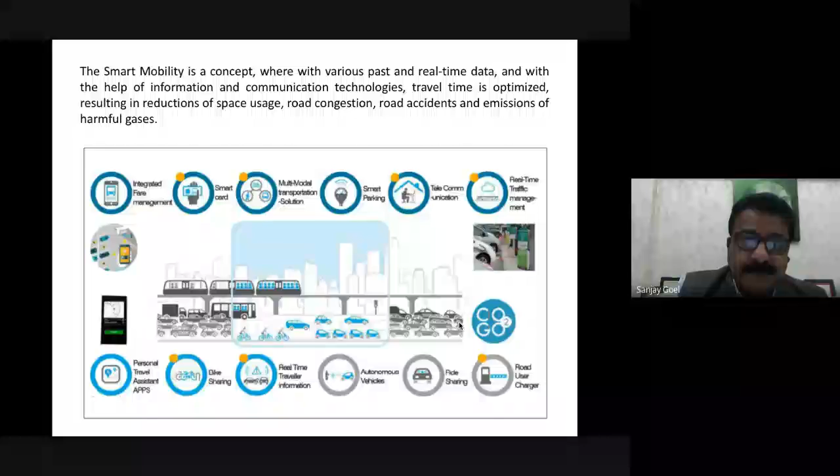Smart mobility is a new and revolutionary way of thinking about how we get around, one that is cleaner, safer, and more efficient, also known as New Vision: zero emissions, zero accidents, zero ownership. To achieve this target, it will take a lot of time, even in our state capitals, even in already livable and best cities like Chandigarh or New Delhi. We have to make more and more efforts as the number of vehicles is increasing at a very faster pace.

The concept of smart mobility includes a wide range of modes of transportation: kick scooters, bicycles, regular bicycles, electrical bicycles, and foldable bicycles, buses, light rail trains, subways, streetcars, taxis, autonomous vehicles, and walking. Moreover, users have the option to own or share.

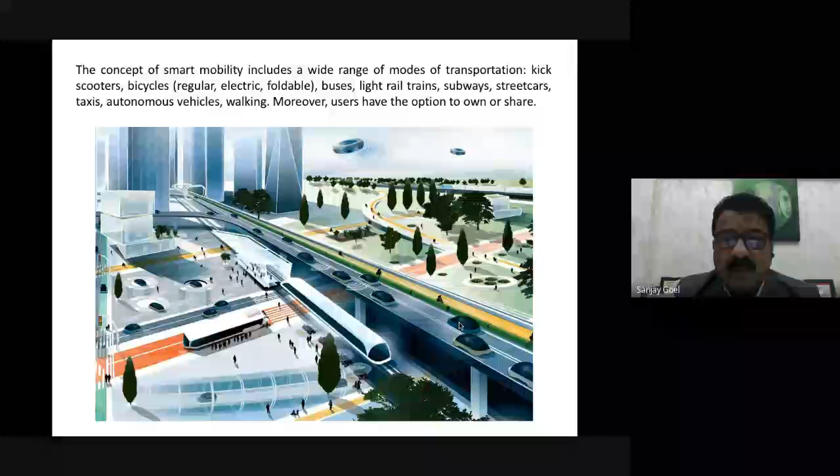So, what is smart mobility? Why is smart mobility needed?

Transportation and the traffic problem. The concept of transportation can be boiled down to two parts: individually owned cars and public transportation systems. We have seen that individually owned cars are increasing, two-wheelers are increasing, but the public transportation system, except in very few cities in India, is not up to the mark. In cities like Jalandhar, Amritsar, Ludhiana, cities of Punjab, and few cities of Haryana including Gurgaon, the public transportation system is not up to the mark.

The car has transformed cities and the way we live. As urbanization and population have increased, road traffic has become a huge problem in cities across the world.

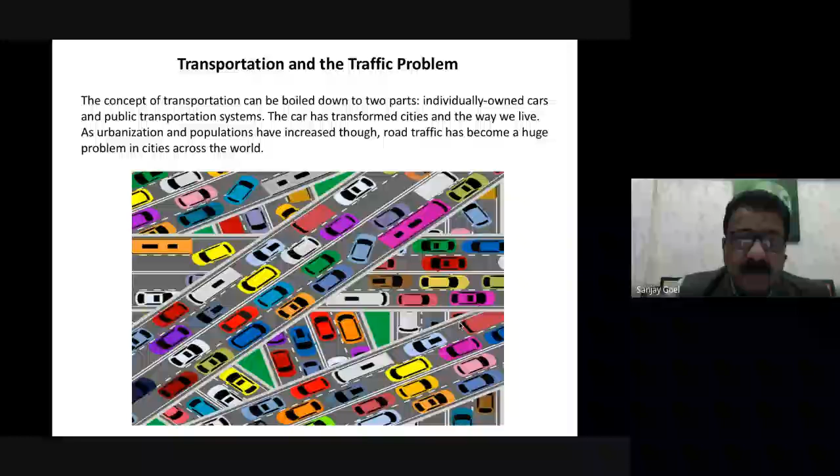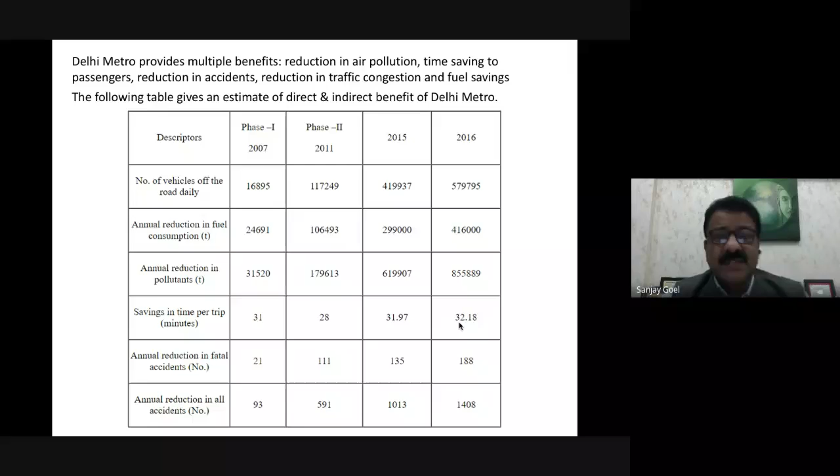Delhi Metro is one of the best solutions we have seen in NCR during the past couple of decades. Delhi Metro provides multiple benefits, which we are expecting in other congested and old cities like Ludhiana, Kanpur, and others: reduction in air pollution, time saving to passengers, reduction in accidents, reduction in traffic congestion, and fuel saving. Let's take this example of how Delhi was before the launch of the metro.

Even today, the scenario is not good in spite of the introduction of the metro, although the metro has increased a lot in number of stations and kilometers covered. The table gives an estimate of the direct and indirect benefits of Delhi Metro, in terms of the number of vehicles off the road daily, annual reduction in fuel consumption, annual reduction in pollution, savings in time per trip, and annual reduction in fatal or serious accidents, among other things.

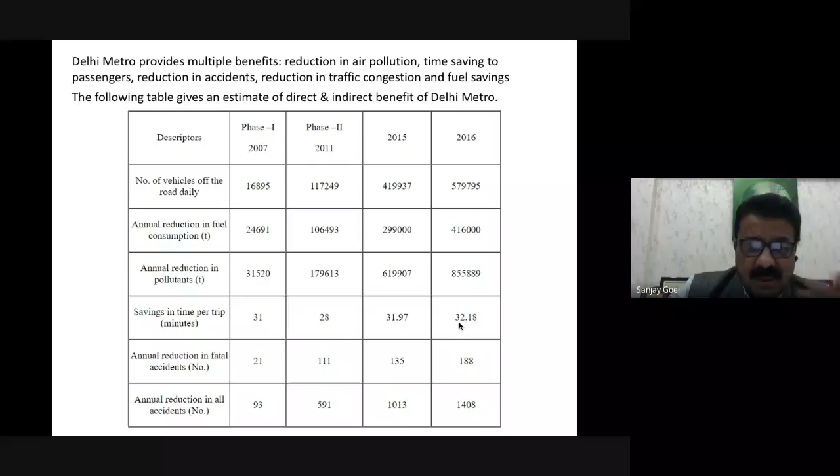We can compare and see that now, in many places, Delhi looks comparatively neat, clean, and green after the introduction of Delhi Metro. With parking available, one can leave home in time, park the car at the metro station, and reach the office or destination within a few minutes. It is a very comfortable path, and we are waiting for the same kind of solutions for the majority of upcoming smart cities.

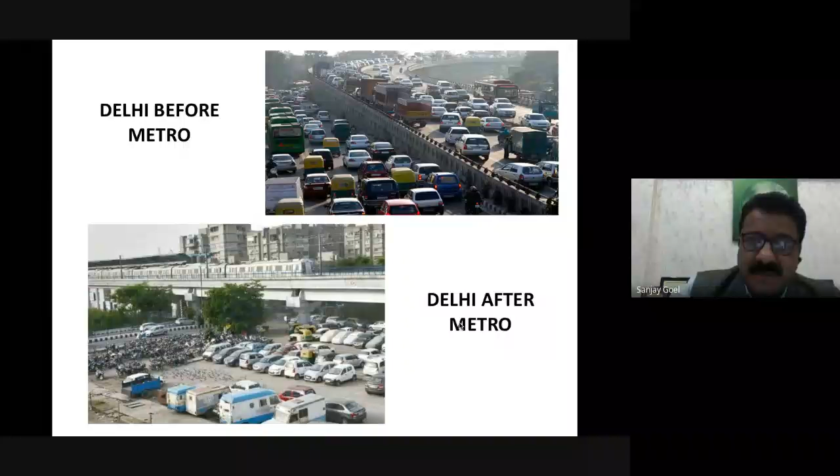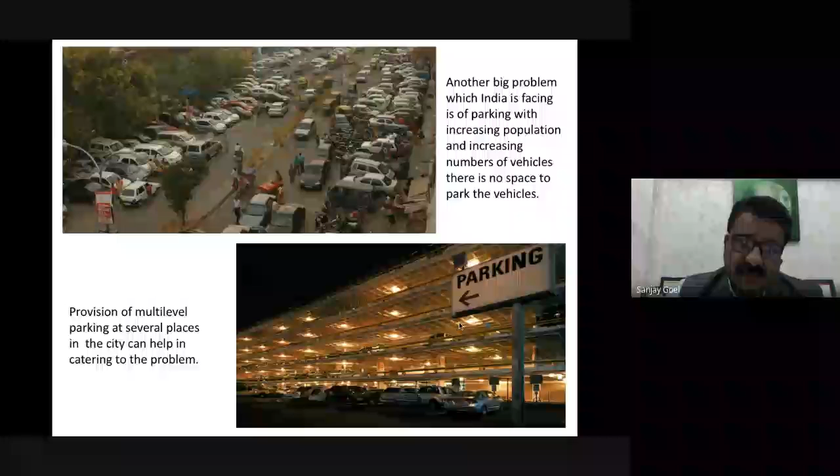Another big problem India is facing is parking. With increasing population and increasing number of vehicles, there is no space to park vehicles. Even in Ludhiana, as a director, I have proposed to the government that we need 10 to 20 multi-level parkings immediately in the city. Even Chandigarh needs many multi-level parkings, although a few big ones have come up, including one in Sector 17. So we still need many more parkings.

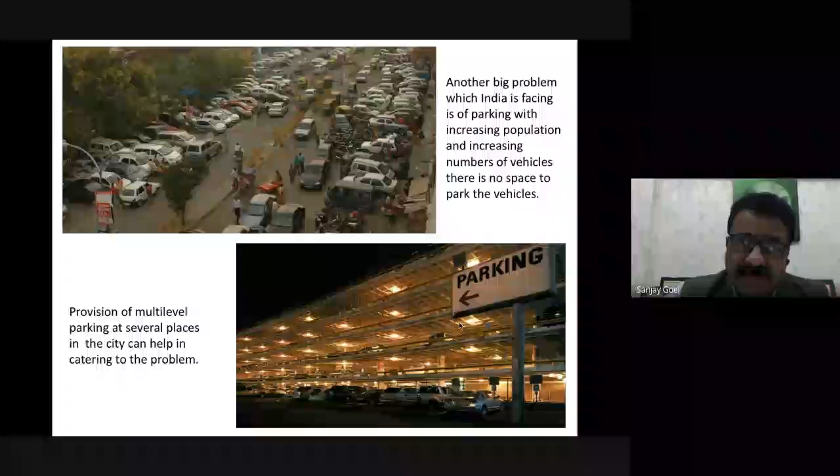Otherwise, it is not easy for commuters to visit the markets during the daytime, as the surface parking is occupied by regular daily users or people going to their jobs. In Ludhiana, as in Jalandhar and Amritsar, Ludhiana is called the Manchester of India, a city of rich people, and there are cars like anything. So there is no space to park vehicles on the majority of roads. There is no alternative for the government now but to come up with multi-level car parkings on government-owned lands. The provision of multi-level parking at several places in the city can help address the problem.

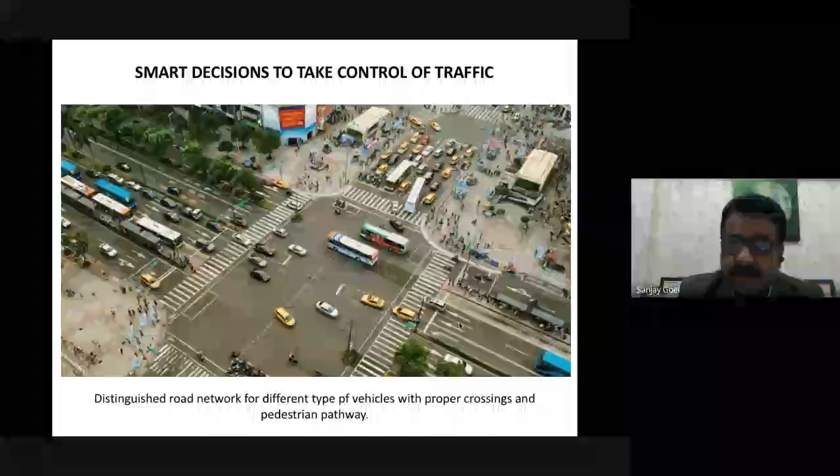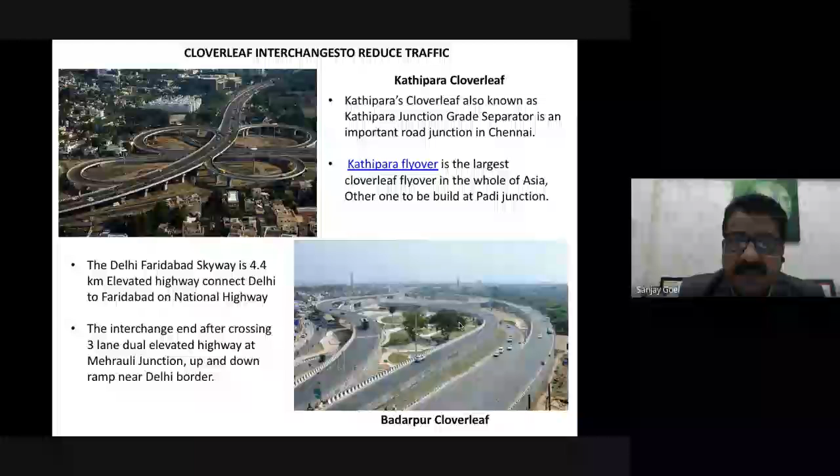Cloverleaf interchanges help reduce traffic. This is Kathipara's cloverleaf, also known as Kathipara Junction, a grade separator that is an important road junction in Chennai. It is the largest cloverleaf flyover in the whole of Asia. Another one is to be built at Padi Junction.

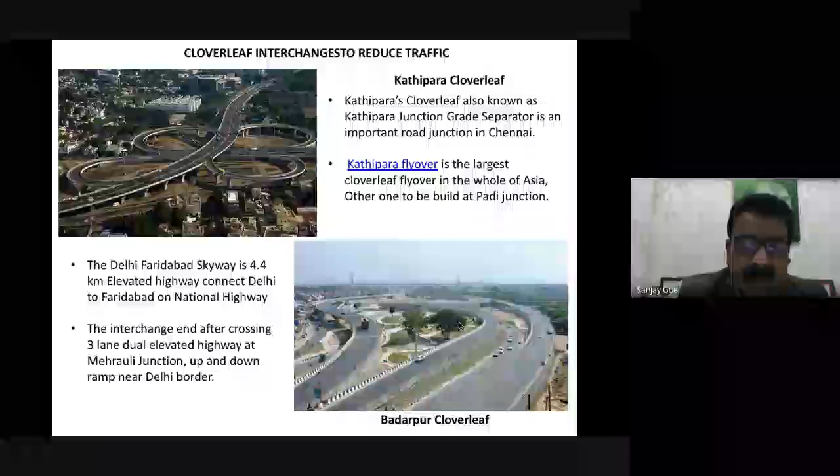The Delhi-Faridabad Skyway is a 4.4 kilometer elevated highway connecting Delhi to Faridabad on the National Highway. The interchange, after crossing the 3-lane dual elevated highway at Mehrauli Junction, has an up and down ramp near the Delhi border. In the attached photograph, you can see the Chennai photograph and the Badarpur cloverleaf.

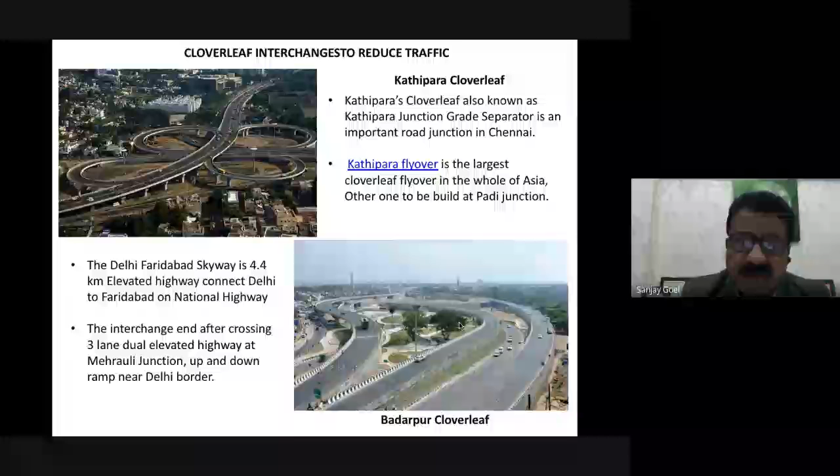So this is another good solution in the National Capital Region in Delhi, near the famous AIIMS hospital. We need these kind of solutions in the coming times in Chandigarh or other cities of Haryana, Punjab, if we are talking about North India, because everybody is looking for traffic-light-free roads for smart mobility.

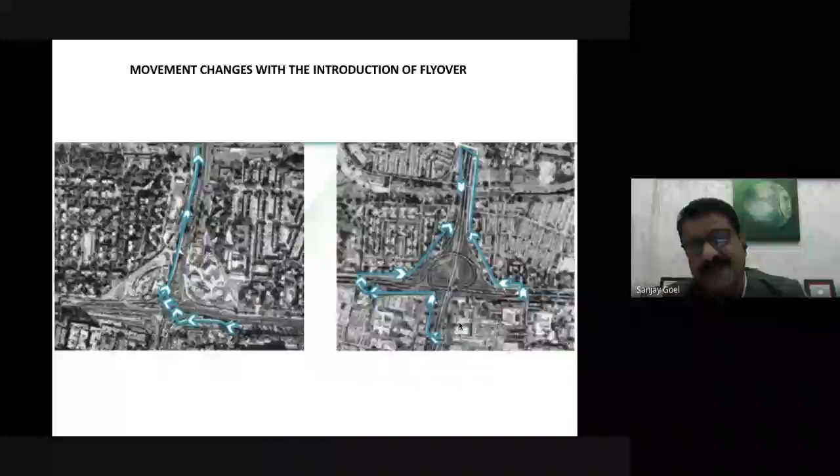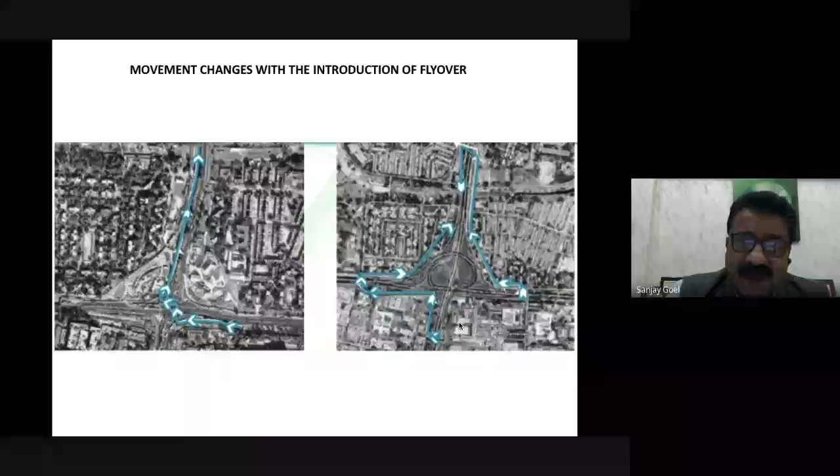Movement changes with the introduction of a flyover. We have seen good results with well-planned and designed flyovers in the majority of cities. Chandigarh is a well-planned city by Corbusier, and people have enjoyed the comforts during the last 5-6 decades. Now Chandigarh is also becoming congested, especially the sectors around Sector 17 and the core heart of the city. Although Chandigarh was designed for a population of 5 lakh only, as far as I know, the present number of vehicles is more than the expected population when it was designed.

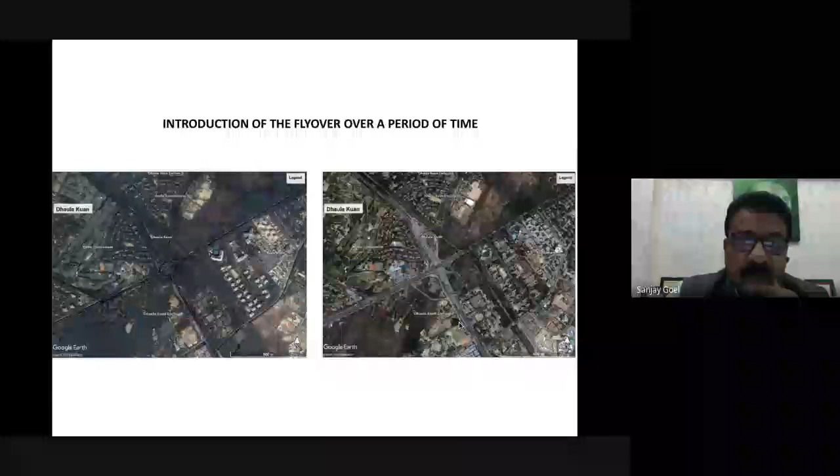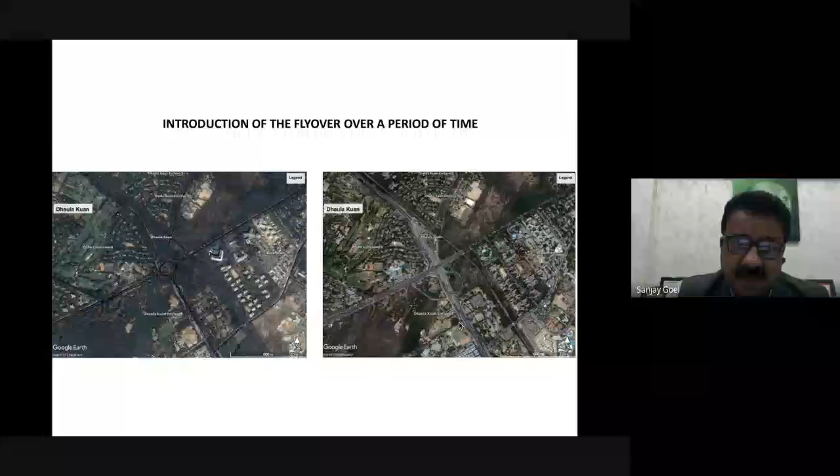So, introduction of the flyover over a period of time. Earlier, we used to build flyovers only for railway crossings, ROBs or RUBs. But now, with the passage of time, we have more and more elevated roads in the cities. Ludhiana is going to have an elevated corridor of a few kilometers within the city, which we never expected, on wider roads like Firozpur Road connecting Ludhiana to Firozpur and Ludhiana to Chandigarh.

In Kolkata, I had a visit. We can see the use of trams in Kolkata since many decades.

The Worli Sea Link is a solution given in Mumbai by the planners. I used to get a chance to travel through this Sea Link, and it has really reduced the number of minutes traveling from one end of Mumbai to the other.

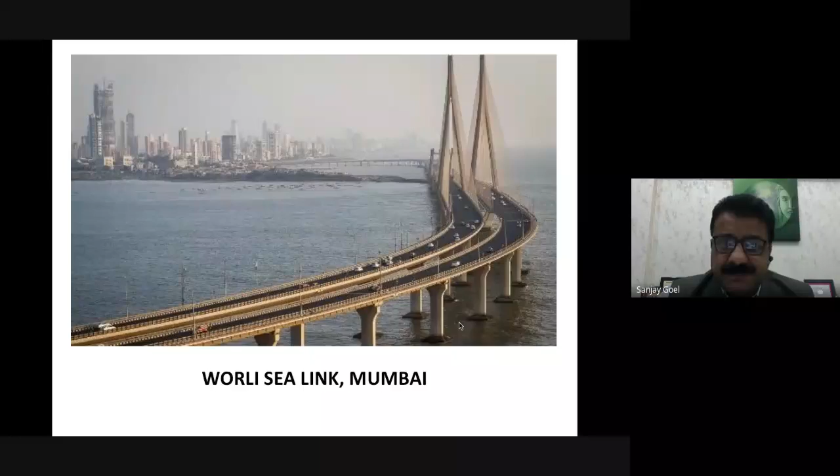So metro is really a wonderful experience. Around three decades back, when I was a student in Chandigarh Architecture College, I came to know that Delhi would have a metro in the coming times. It was really surprising news at that time - what kind of train would be there, not only above the ground but also underground as well as on the ground. So we have achieved that target, and expansion is taking place.

Hope more and more state governments and upcoming smart cities will make use of metro so that congestion on the roads is minimized and mobility is as smart as possible, on the pattern of already developed cities.

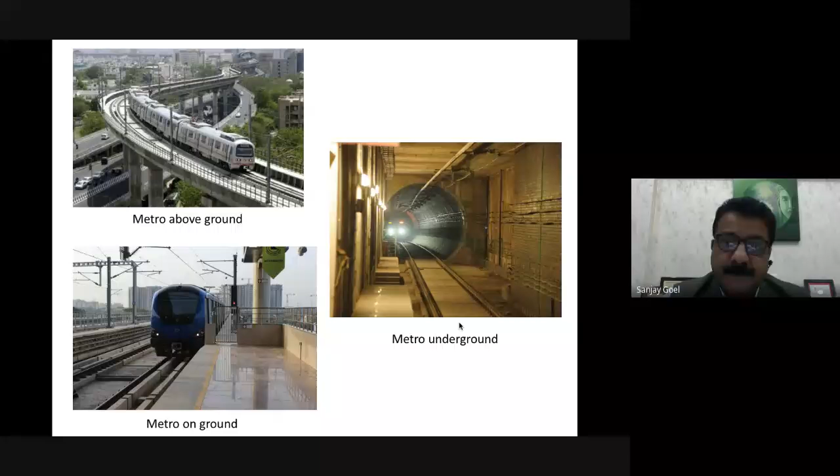We know that in majority of our B cities, or even metro cities, the areas are encroached. Encroached roads cause traffic and congestion on the road. We can see 20 to 40, or even in many cases 50%, of the road encroached on both sides in the cities. So non-encroached roads help in proper flow of traffic.

Our rules are there, but implementation of the rules is not up to the mark. That is also required - only then can we achieve the target of smart mobility. Otherwise, many people, especially patients and students or children, waste a lot of time for their daily requirements.

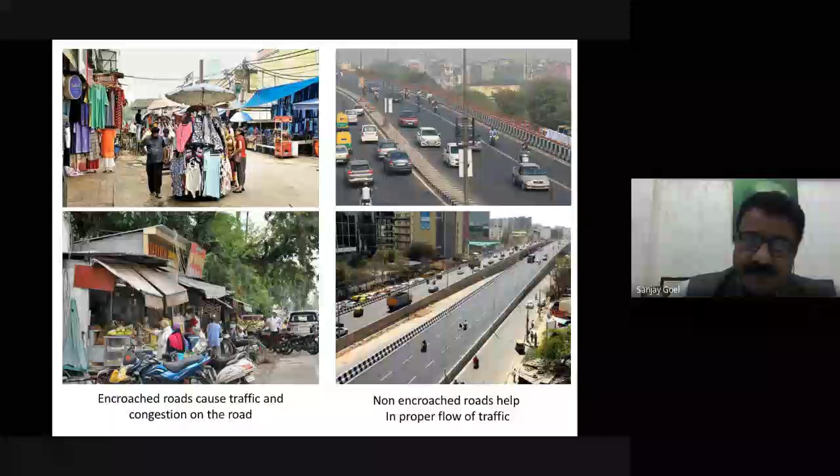Smart connected urban mobility, smart transport demand management, green mobility by smart work centers at connected transportation hubs, effective reduction of traffic volumes to and from city centers, eco-transport modes, eco-friendly new transport means like e-bikes, BRT system, bus-only lanes, PRT, LRT. Increase the share of public transportation up to 75%.

Carbon footprint management, personal mobility carbon footprint management, mobile features for rapidly increasing smartphones, smart traffic control, location, time and distance based dynamic tax and road pricing, traffic flow tracking and location-based services. All these things are required to achieve fast mobility or smart mobility in our cities.

The Ministry of Urban Development, Government of India has proposed the Green Urban Mobility Scheme. I will share a few of the ministry's guidelines - indicative components of the Green Urban Mobility Scheme. First is sustainable urban mobility infrastructure enabling bus systems, safe pedestrian pathways, cycle tracks, and public bike sharing.

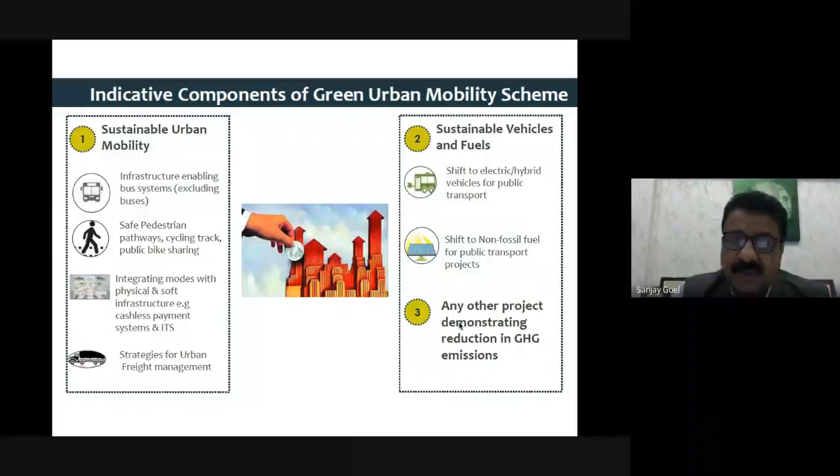Shift to non-fossil fuel for public transport projects. Third is any other project demonstrating reduction in GHG emissions. Expected outcomes: sustainable transport accessibility to nearly 58% of the urban population, pedestrian and cycling facilities, public transport facilities, and UT financing and institutional strengthening.

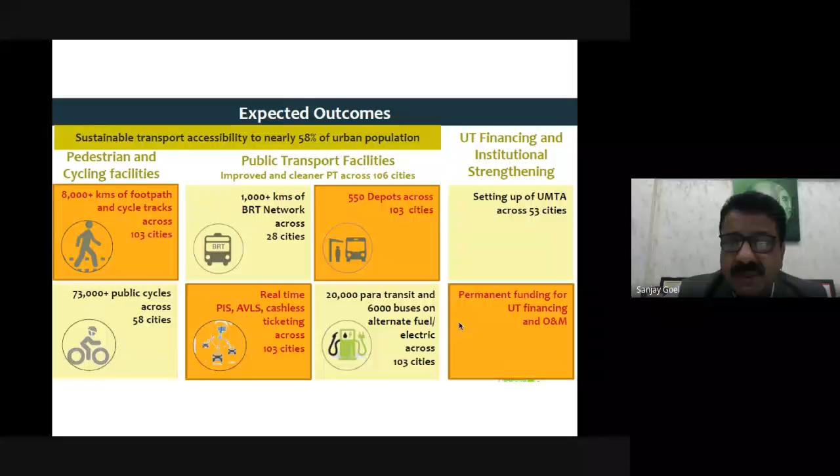So, a few smart city solutions by the Government of India: e-governance and citizen services, which is happening, and integrated command and control centers are coming up in the majority of upcoming smart cities. Waste management is a big task and a big challenge because garbage disposal and waste management is a big learning and a big challenge for the local government, along with water management, energy management, urban mobility, and others.

So waste management includes waste to energy and fuel, waste to compost, wastewater to be treated, recycling, and reduction of C&D waste. And for e-governance, we have to go ahead with public information, grievance redressal, electronic service delivery, and citizen engagement.

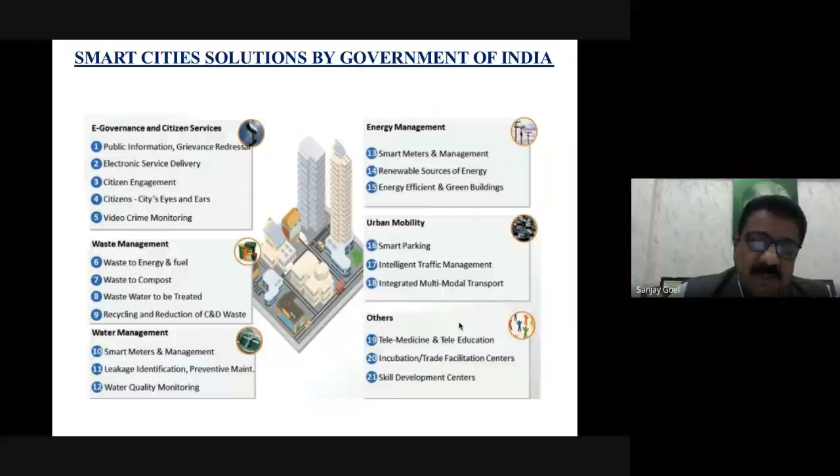Cities' eyes and ears, video crime monitoring. So the majority of cities are coming up with CCTVs on the major roads or all roads, where not only can local government use them for their services such as water supply, sewerage and other issues to take control for citizens, but the police department is also taking a lot of help from these cameras for a safe city and comfortable city.

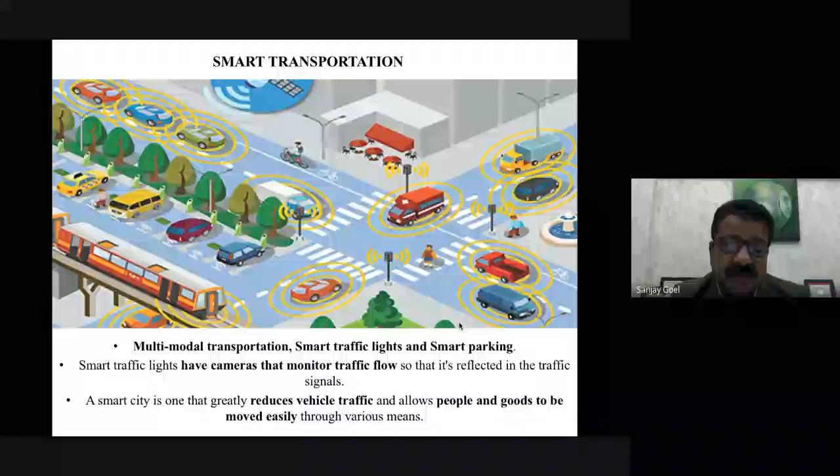Smart transportation: multimodal transportation, smart traffic lights, and smart parking. Everything is required in a livable city. Smart traffic lights have cameras that monitor traffic flow so that it is reflected in the traffic signals; these are automatically adjustable. A smart city is one that greatly reduces vehicle traffic and allows people and goods to be moved easily through various means.

So coordination is a major thing. While on roads, we come across not only local government or corporation related matters, but also electricity department issues related to traffic lights. Trees, many times, are in the jurisdiction of the forest department, along with electrical poles and BSNL poles. So coordination between various departments is a must for smart mobility, smart transportation, and a livable city.

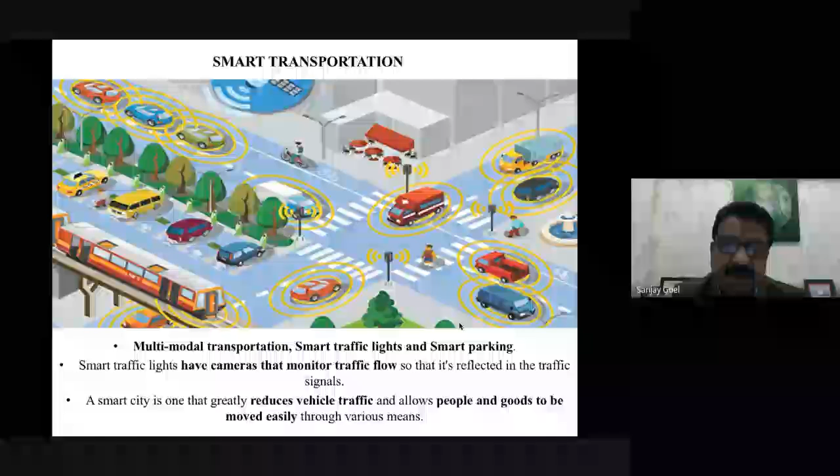There are examples from Chandigarh. The Chandigarh Smart City project is going on, we know. So this is the French idea for public transport: 3 tri-city corridors were proposed. Three transport corridors connecting Chandigarh, Panchkula and Mohali have been proposed by the French firm Systra in its detailed study for a mobility plan under the Chandigarh Smart City project.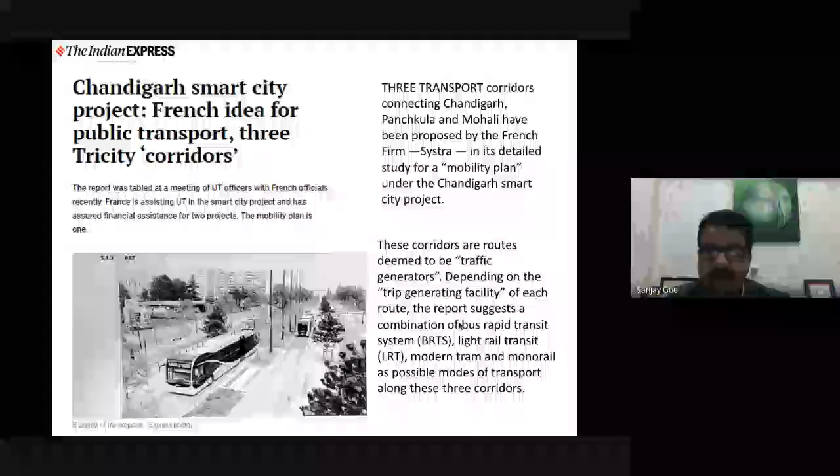These corridors are routes deemed to be traffic generators. Depending on the trip generating facility of each route, the report suggests a combination of bus rapid transit system (BRTS), light rail transit (LRT), modern tram, and monorail as possible modes of transport along these 3 corridors. This report was tabled at a meeting of UT officers with French officers a few months back. France is assisting UT in the Smart City project and has assured financial assistance.

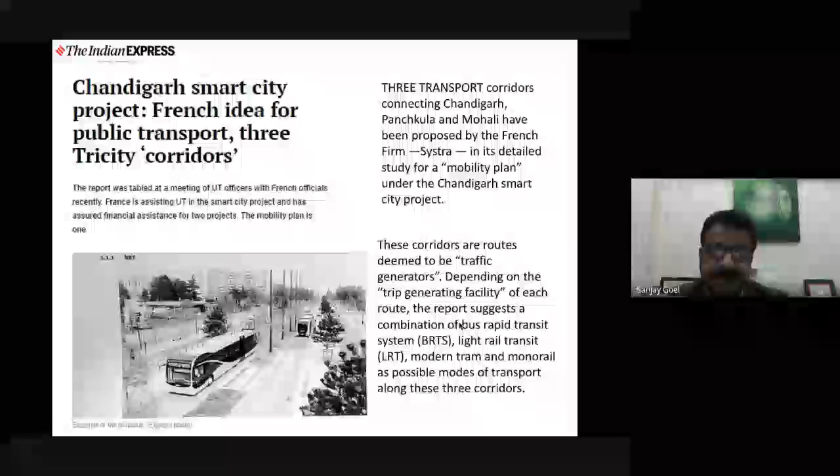In this study, the term tram will refer to modern tram. Segregated lanes and junction priority allow good headway, commercial speed and capacity. Considering environmental issues, modern tramway projects offer a new share of public space in favor of pedestrians and cycles. The corridors have been chosen after looking at the transport demand at different stretches in the city.

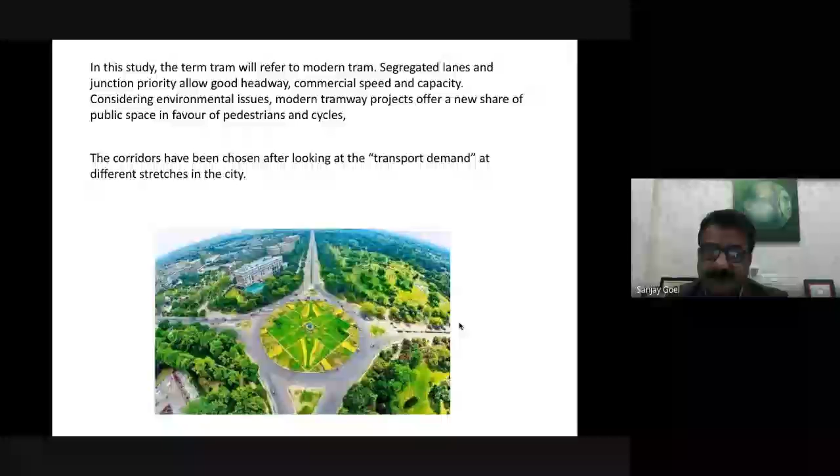Mahindra and Mahindra has announced the launch of Glide, a premium tech-based e-mobility service in Mumbai on select routes. After tying up with Ola for their e-mobility solution platform, Dr. Pawan Goenka, MD Mahindra, flagged off the first batch of 10 e-Veritos to offer people a solution to reach their homes with no carbon footprint.

So, few key principles of smart mobility. The concept goes beyond just alternative forms of transportation. Smart mobility is built on the following principles. Flexibility: multiple modes of transportation allow travelers to choose which one works best for a given situation.

In a few cities in India, we have multiple options, for example local trains, local metro, local buses, and a few more taxis as well. But still in the majority of cities, big cities are really old and not planned, so multiple options are not available.

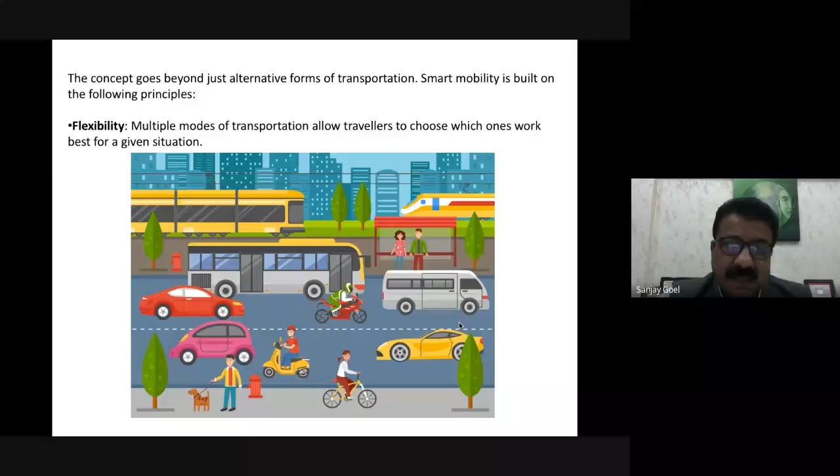Hope under the Smart City Mission, the Government of India and the state governments will work in this direction so that multiple options are available at least in the top 100 cities of India, so that other cities can learn and implement similar kinds of projects in their cities in the coming times.

Efficiency: the trip gets the traveler to their destination with minimal disruption and in as little time as possible. Integration: the full route is planned door to door, regardless of which mode of transportation is used. Clean technology: transportation moves away from pollution-causing vehicles to zero-emission ones. Safety: fatalities and injuries are drastically reduced.

Two more aspects of smart mobility are accessibility and social benefit, which means that it should be affordable for everyone and help provide a better quality of life.

Vehicle-to-infrastructure technology is similar, in that the vehicle is able to send and receive information. In V2I, the infrastructure can include physical things such as traffic signals and weather alert systems. The vehicle can send data out while simultaneously the infrastructure can send important data back.

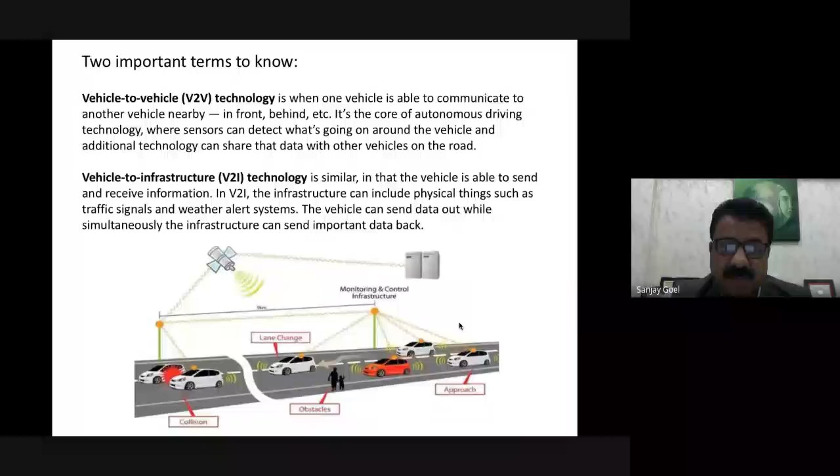Solutions for parking: sensors detect whether a parking space is occupied or vacant. A similar application has started in Ludhiana at one place, and I have heard of one in Chandigarh as well. Number two, sensors transmit data to the central server.

Number three, a smartphone app requests a parking space and guides the driver to the free space. Parking fees are paid directly through the app, with special permit parking for local resident IDs, taxis, coaches, and deliveries. And the last is legitimation, access control to restricted traffic areas such as loading zones and residential parking. So smart apps and smart parking solutions are the need of the time.

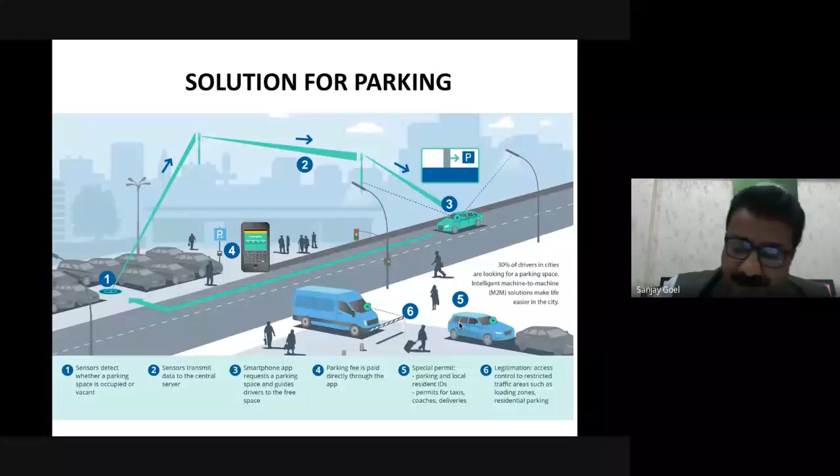A few smart mobility solutions. Adaptive traffic signals: traffic signals are getting smarter through V2I technology. By getting a better idea of traffic flow and how long a vehicle idles at stoplights, the city can better modify traffic signal timing with the change in traffic throughout the day.

It is there in Chandigarh, but not in the majority of other cities in North India, including cities of Haryana and Punjab. Especially, I can say about Amritsar, Jalandhar, and Ludhiana, the mobility and traffic light system is very poor.

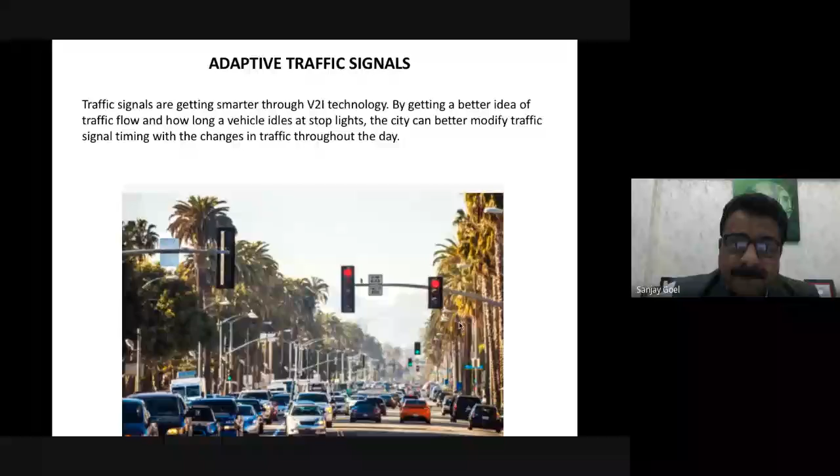Then a few smart corridors. Adaptive traffic signals are one piece related to some other smart corridors. Smart corridors can address traffic-congested roads as well as hazardous areas, such as one major highway that can be used heavily for freight transportation in addition to regular passenger cars.

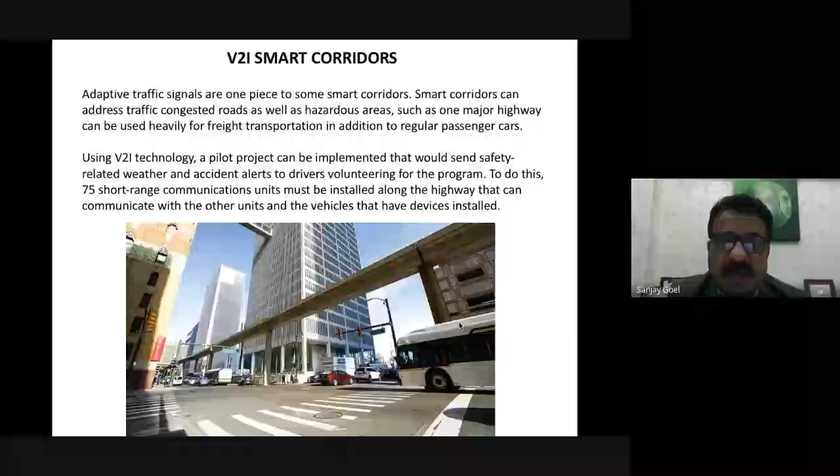Using V2I technology, a pilot project can be implemented that would send safety-related weather and accident alerts to drivers volunteering for the program. To do this, 75 short-range communication units must be installed along the highway that can communicate with each unit and the vehicles that have devices installed.

Another is autonomous vehicle technology. While autonomous vehicles for passenger cars won't necessarily decrease the number of cars on the road, with fewer accidents and driver-caused traffic, autonomous vehicles are likely to reduce congestion.

Platooning is one example of autonomous vehicle technology. If all vehicles on the road had autonomous technology, vehicles would be able to speed up, slow down, and merge onto and off freeways without human direction, creating a much smoother driving pattern.

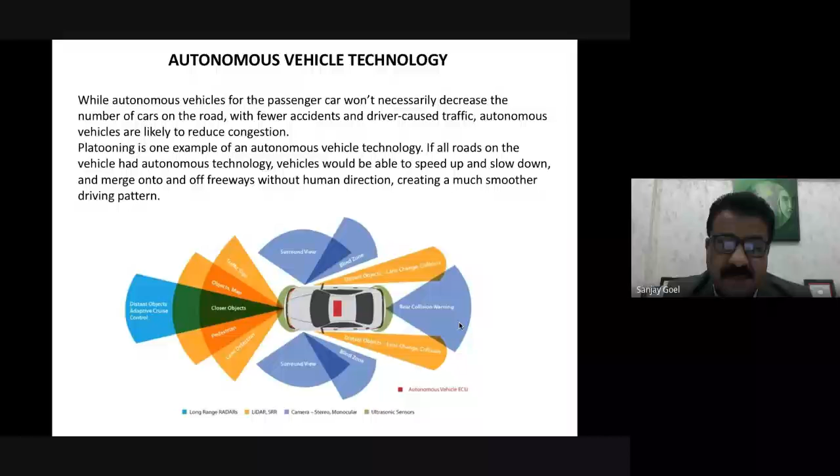Real-time traffic feedback also makes concepts like congestion pricing a little easier to sell to consumers who are used to using roads for free. Instead of the typical toll for express lanes, this would change the pricing structure based on peak traffic times and for high occupancy or exempt vehicles, with the goal of discouraging single passenger drivers from being on the road at peak travel times.

Tracking pedestrian traffic. Addressing traffic congestion is also about understanding pedestrian traffic. The city can get alerts when a pedestrian is on a roadway when the light is about to change, so they can delay the light if needed, increasing the safety of the streets. It is really good for pedestrians, as green and red lights will adjust accordingly.

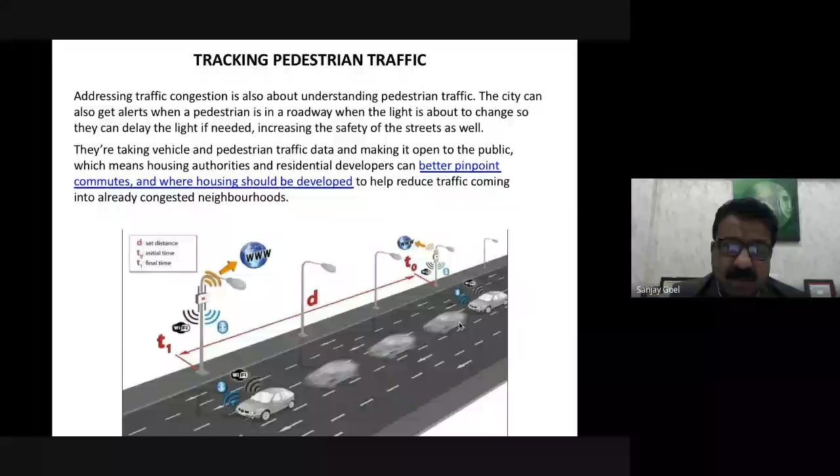They are taking vehicle and pedestrian traffic data and making it open to the public, which means housing authorities and residential developers can better pinpoint commutes and where housing should be developed to help reduce traffic coming into already congested neighborhoods.

Car sharing and multimodal solutions. City planners and those in the public transit industry see it as an issue of connectivity, making it easy to grab a car through a private company's app to head to a public transit station. So car sharing is there in all the cities we have seen.

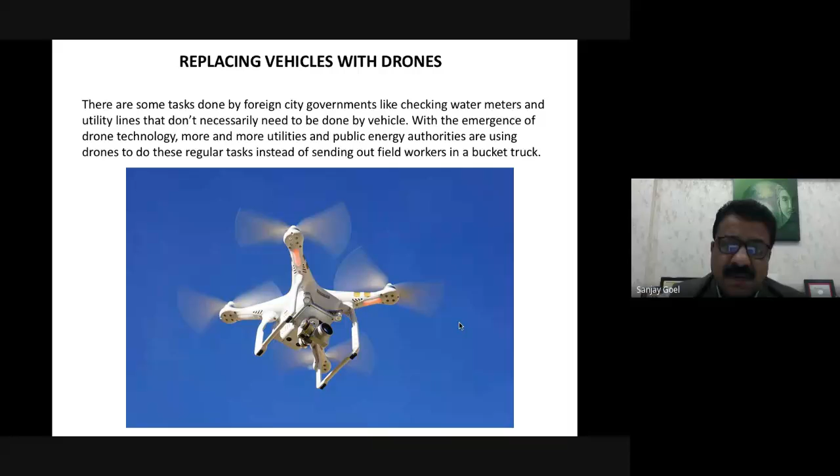Now we can see the use of drones, how drones can be used to minimize traffic on the roads. A few functions or activities which can be managed by government agencies through drones reduce the use of vehicles by their employees. There are some tasks done by foreign city governments, like checking water meters and utility lines, that do not necessarily need to be done by vehicle. With the emergence of drone technology, more and more utilities and public energy authorities are using drones to do these regular tasks instead of sending out field workers.

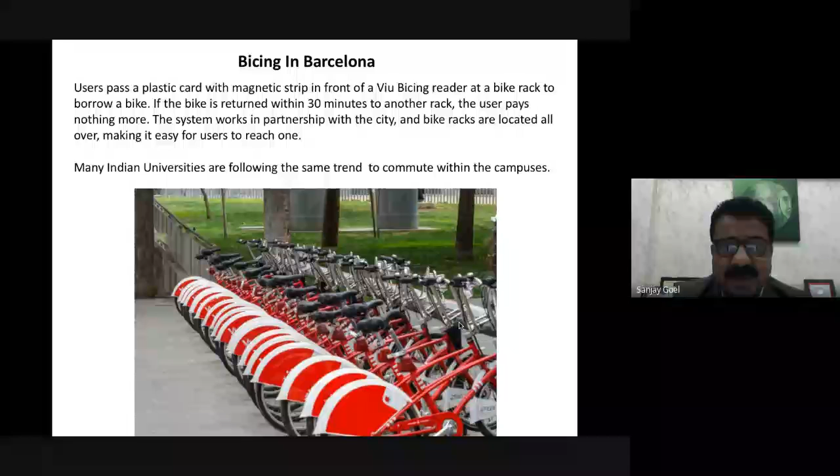Then Bicing in Barcelona. Users pass a plastic card with a magnetic strip in front of a reader at the bike rack to borrow a bike. If the bike is returned within 30 minutes to another rack, the user pays nothing more. The system works in partnership with the city, and bike racks are located all over, making it easy for users to reach one. We are planning something similar in Ludhiana at approximately 10 places, where bicycles will be available and one can pick up a bicycle from any point and drop it at the next or next-to-next point.

Singapore driverless mass rapid transit. Singapore's Smart Mobility 2030 strategic plan is an example of a smart plan that focuses mainly on transportation. The project aims to be informative, interactive, assistive, and to use green mobility. The LTA and ITSS have outlined three key strategies to achieve their goals: to implement innovative and sustainable smart mobility solutions in Singapore, to develop and adopt intelligent transport system standards, and to establish close partnerships and cooperation.

Then Songdo Business District in South Korea. The city has ambitious goals to be environment friendly, bike friendly, and car free. Pneumatic chutes collect and handle waste underground, eliminating garbage trucks on the roads. Televisions in residences are being wired so residents can access municipal administration.

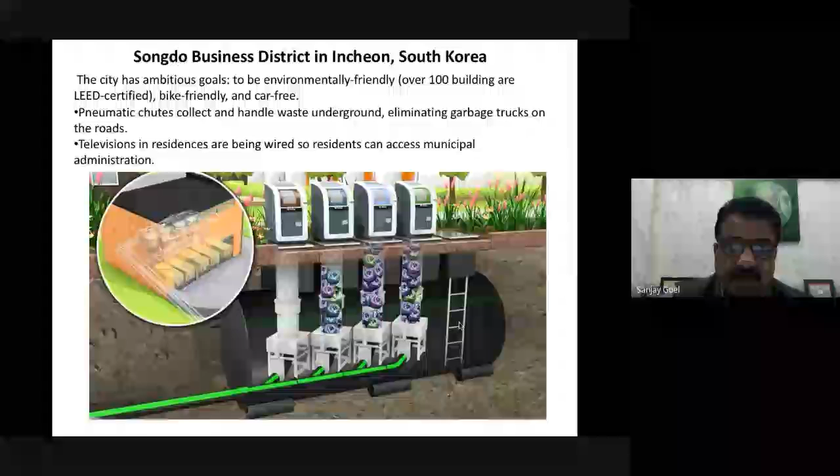So what we have seen, whether it's Chandigarh or Ludhiana or Delhi, public participation is the key to any smart city or smart solution, including smart mobility. Until the public or experts from the public participate in day-to-day deliberations at the government level, the solution can't be achieved. We know that problems of cities and towns differ for different reasons, and experts sitting in other countries can give a broad outline of the solution, but micro solutions can be provided only by experts—planners, engineers, and architects—at the local level.

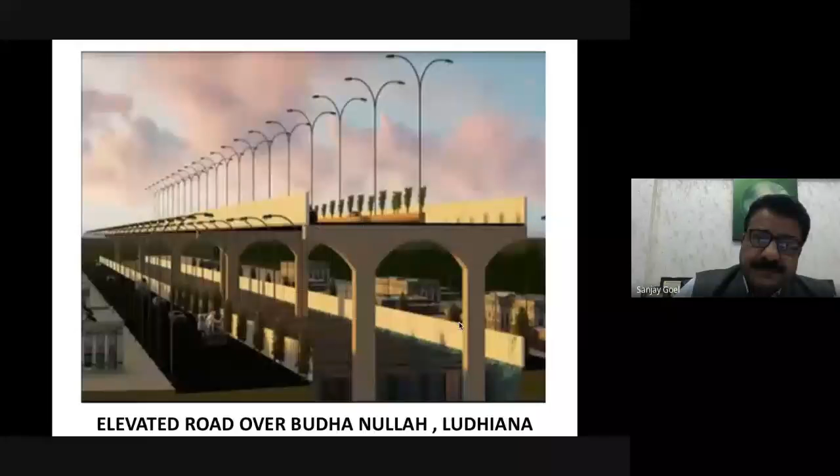Then even this is a sketch plan. We had proposed a road above one of the old existing nullahs in Ludhiana city. We know that in old cities it is not easy to build more roads—we cannot create more roads, and it's not easy to acquire land from people who already own properties. So we suggested that the old nullah land can be used for an elevated road as well, the nullah can be cleaned, and the river can flow below the road.

So with smart mobility, after going through a detailed survey and discussions and the negative points in the existing cities, smart solutions are there. We have to learn from the developed cities in developed nations how smart mobility can be implemented in our cities and towns. Although 10 to 15 cities have started implementing smart mobility in India, it will still take a lot of time because we need a lot of funds as well.

And we can see that most governments at district level or state level are often short of funds and infrastructure. So smart mobility promises true convenience using whatever mode of transportation best suits a traveler, with better health and saved money. The options for implementing smart mobility are as varied as the different flavors of ice cream, leaving municipalities lots of room to find solutions tailored for their residents.